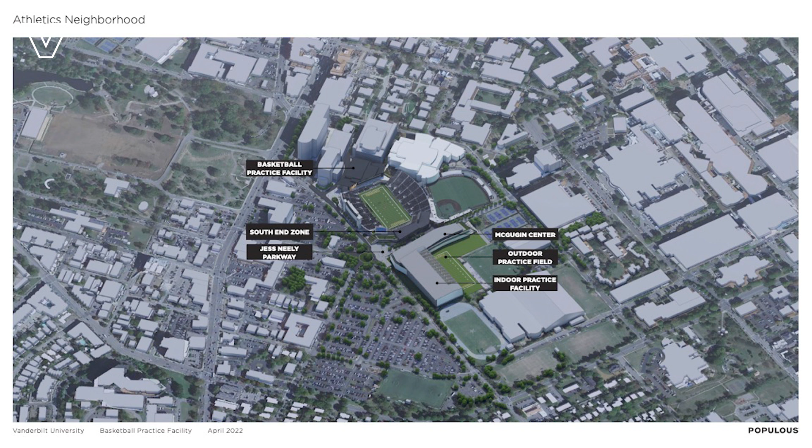So the overall athletics neighborhood is going to be absolutely transformed when it's all said and done. We're going to be in relationship with Vanderbilt for a long time, and we're absolutely thrilled about it. One of the things we're going to talk about is the basketball practice facility, but I wanted to show the overall vision of what Vandy United is going to end up being. This is basically a snapshot of some of the major projects within this first phase of the work that we're going to be doing.

Can I just jump in, Al, to say that what you're seeing right now are the projects that we have publicly announced. There is more work to come, but we're being very deliberate to unveil those when we have more concrete information. So there is more to come. Right. So Candice, like you said, we always love to start with the vision, with the core values, and it started day one, right? Yes.

After we were selected and had the opportunity to talk with you and Chancellor Diermeier, this quote hits me every time I see it—what Vanderbilt is about and what you're wanting to do with these athletics projects. So we're very fortunate to be in partnership with Vanderbilt, because at Populous we feel like we're at the forefront of disrupting all the sports and entertainment projects we work on.

So let's get right into it. Before we put pen to paper with anything, we listen, and we've been very intentional about engaging with a lot of user groups and constituents. This is the basic framework of what we've heard over the first couple months of working with Vanderbilt. We want to make sure we grasp and understand the history, speak to the tradition and excellence, and make sure the architecture is clean. But at the end of the day, it's all about performance and enhancing the student athlete experience.

When we talk about elite and development, we want to make sure that's at the forefront of our design thinking. As we go into our core design principles, we take the things we've heard and distill them down into form making—ideas we really want to drive home across all these projects. With the basketball project specifically, we want to make sure it's performance driven, all about the student athlete and development, both athletically and academically.

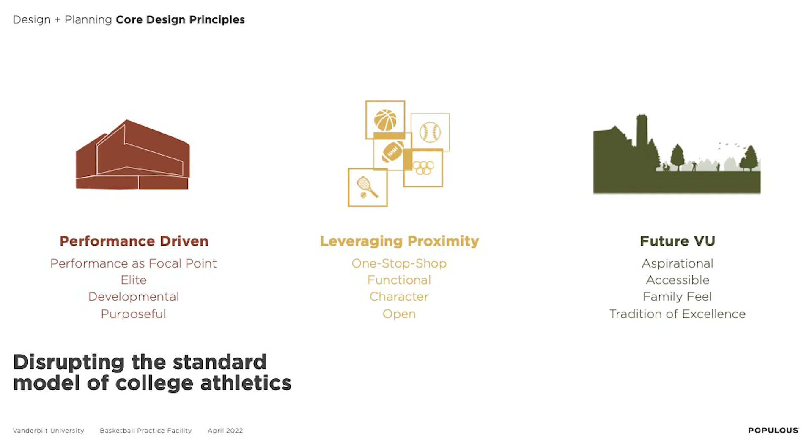Candice, you said you're landlocked. I'm a firm believer that constraints bring out the best design thinking, and I'm excited to share what we've done with the basketball building to leverage that proximity and make it a positive, not a negative. Right—one of the things you said was you wanted to take advantage of this space and not fight it, which I thought was an interesting way of putting it.

Absolutely. With the campus and the athletics neighborhood being so tight, we felt we had a lot of opportunities to take advantage of the closeness. You'll see in the diagrams here in a second how we're embracing the proximity, embracing the closeness, and connecting the new buildings to the old and the old to the new, really making it a cohesive neighborhood. As we move forward, it's exciting to see how this all comes together.

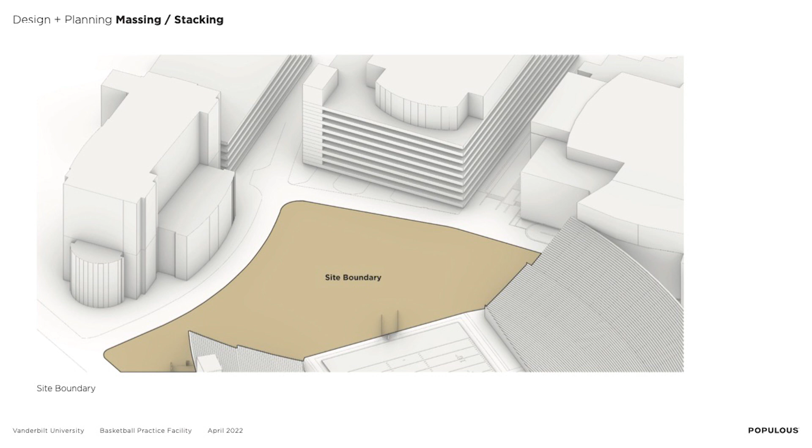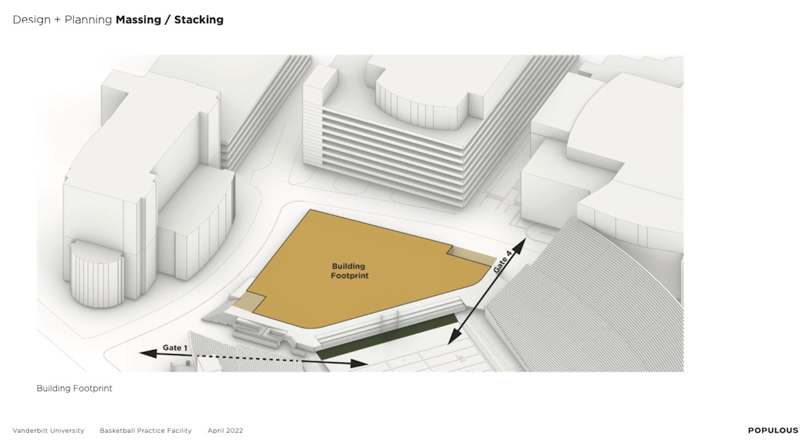We've mentioned a couple times now the challenges of the site—not only is it tight, but the shape is unique in and of itself. One of the things we always do first is make sure we get people in and out in a safe environment. Given the uniqueness of our site, we had to honor the existing conditions—Gate 1, Gate 4, those are gates into football, so we had to maintain those. That helped us develop the building footprint.

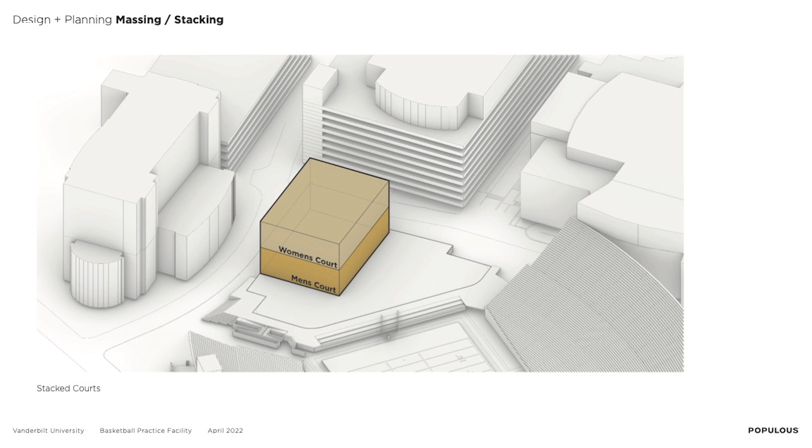Step two of designing this building centered on the function of the facility. We obviously needed courts for both the men's and women's programs. In an ideal situation you'd want these on the ground together, but given the site constraints and the limitations from expanding due to the Marriott to the north and Memorial Gym and the Kensington Garage to the east, we had to stack the gyms. This is something we've done before—there aren't a lot of building types like this in the country, but we've done it before and we're very confident it works.

This ended up giving us a very unique situation with a basketball practice facility that you typically don't see. When a practice facility is spread across one level, you always want to locate your performance programs—the weight room, locker rooms, athletic training—on the same floor as the basketball court. In this situation, we were able to not only do that but also include the coaches' spaces, whereas on a more traditionally laid out practice facility, you'd have a second floor dedicated to coaches and staff.

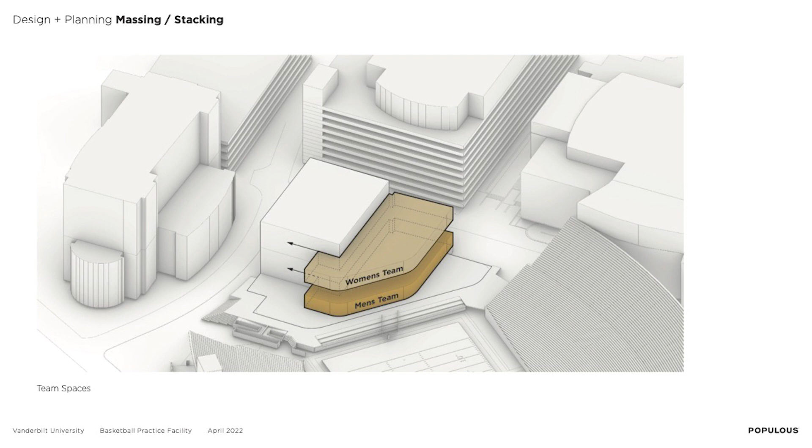Given the site constraints, we had to get really creative on programming the building so everyone has the adequate space, and it provides a different leverage point for student athletes to move around efficiently. We all know that student athlete time is delicate and sensitive, and we need to be sure they get from point A to point B as efficiently as possible.

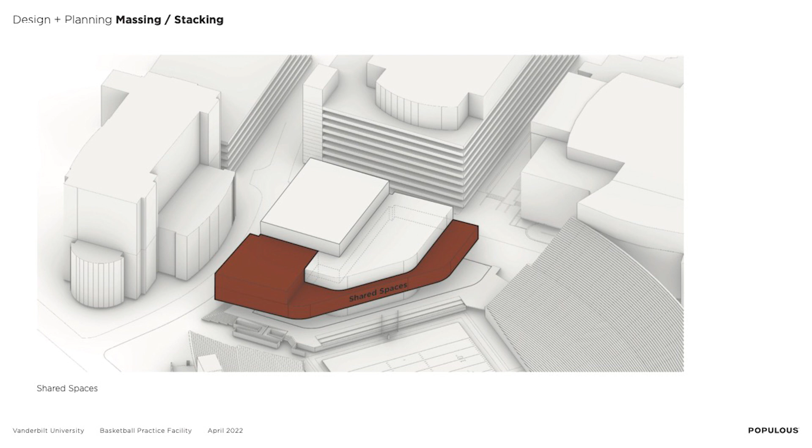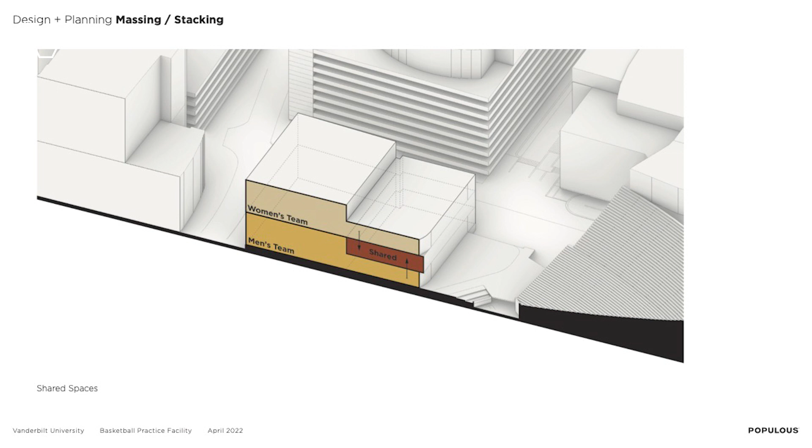So we felt like stacking the program for men's and women's provided that opportunity. Finally, in the middle of this environment is the shared spaces, where the weight room and athletic training live. If we cut the cake in half, you'll see that offers us an opportunity for the men's and women's teams to have equal access to those shared spaces. The hydrotherapy, athletic training, weight room - everyone will be able to come at equal distance to these spaces. One of the things we see in a more traditional practice facility is sometimes the men or women may have a little bit of a better access point. We feel like we've solved that part of the puzzle by sandwiching the shared spaces in between the two programs.

And I have to say that I watched you all iterate through this and take the feedback from the coaches, and the fact that you found a way that both programs could have equal access - that's consistent with who we are. So I very much appreciate, and on behalf of our programs, appreciate that y'all took that very seriously.

Absolutely. Equity is important to us. We take that very seriously. It's not about Title IX - it's just about offering an equitable experience for everyone involved in experiencing this building.

And Candice, too, I think that's good - the student athletes and coaches have the chance to have those interactions on a daily basis, where the programs are working together and you're not just separated by floors, but everybody's together in the same space. Yeah, I think that's important. One of the things we were excited about with so many aspects of Vanderbilt basketball - I talk about this a lot - is watching Jerry Stackhouse and his program and Shea Ralph and her program support each other. Their kids cheer for each other, they pick each other's brains. This building represents the tone of those programs, where everybody has their own space, but there's also a shared aspect, and then it's connected to the broader athletics footprint, like football, things that touch all of our student athletes. That's who we are.

So Al, I remember you saying early on in one of our meetings that everything that we did would be a tangible representation of who we are - everything you all gave us would represent what Vanderbilt stands for. I'm excited about this because I think this is a great example of that.

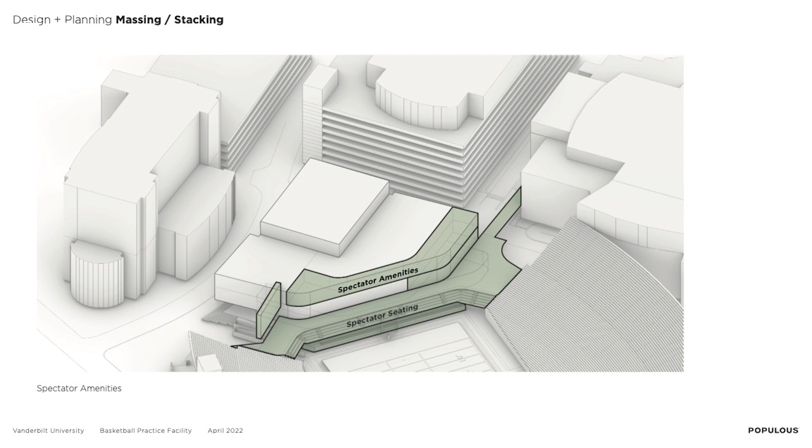Finally, to support those spectator facilities and amenities, we wanted to give the North End Zone fans a premium experience, with lounges and club spaces we've created that serve as multi-purpose space for basketball as well as football. Even beyond that, it's multi-purpose space we could end up using every day of the week. It will enhance game days, but we have the opportunity both within athletics and beyond to utilize the space. It's much needed space, so I'm excited about that.

Let's dive into the floor plans. First and foremost, in regards to carving out the site and developing our building footprint, and building the volumes to understand our function, getting folks in and out of this facility was a little bit of a tricky challenge.

If you remember, the North End Zone right now is a back-of-house situation. For concerts it serves as stage-in, emergency vehicles come in and out of there, and on a Tuesday afternoon it's where operations kind of lives. So we understood what that meant, putting a building there essentially turns a back-of-house situation into a very front-of-house situation. We'll talk a little bit about what that means here in a little bit.

We organized the building in a couple of different ways so that we gave the public a clear understanding of where the gateway into the neighborhood from the north is. At the same time, we wanted to make sure the basketball programs had a direct and clear understanding of where their home starts. Understanding that the majority of the student athletes come in from the east, we felt putting the team entry on the east side of the building made the most sense.

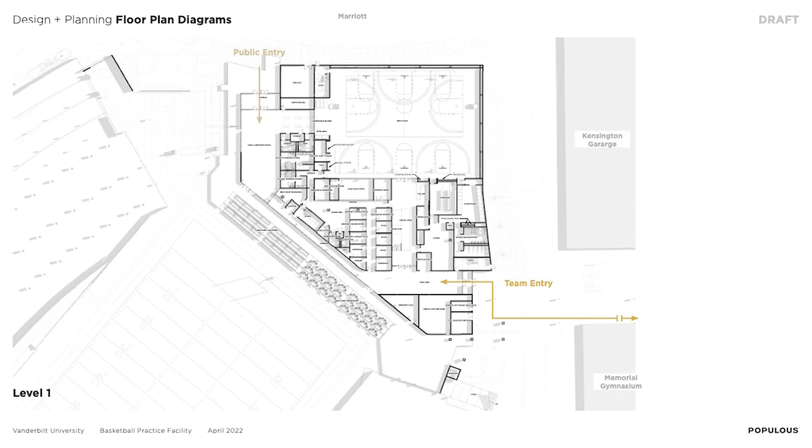It's a private, dedicated entry for student athletes, staff, and coaches, while we locate the public more to the north and west to give them access to a brand new building. We're also transforming Gate 1 into a more pedestrian-friendly and inviting environment, hoping to increase traffic there on football game day. On level one, we have our men's coaches' offices, staff offices, and locker rooms. In between all of that, and this permeates through the entire building, we've got what we call the central spine—the heartbeat of the facility, where student athletes, coaches, and staff will be able to meander up and down this spine and share space with one another.

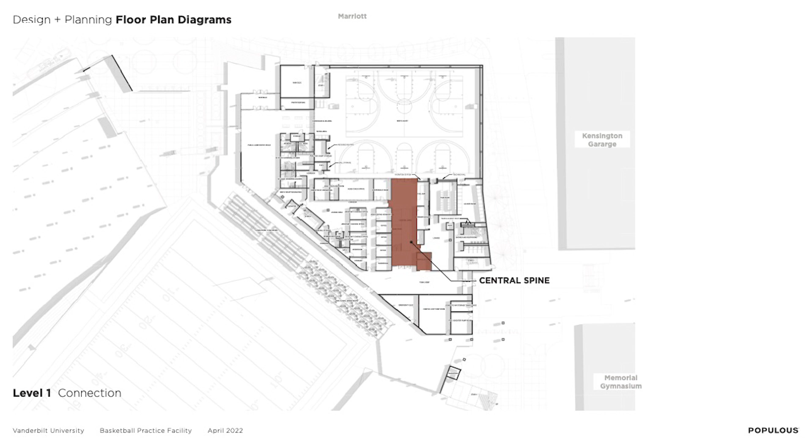In designing facilities like this, what have you learned about how the flow of the buildings works, and how things make sense as far as where the athletes, the student athletes, and the coaches have their own space, but it all makes sense in terms of how you travel throughout the course of a regular day?

Yeah, it's all about efficiency, right? Getting the student athletes where they need to be as quickly as possible, because time is limited. The time with coaching staff is limited, time to train is limited, time to practice is limited. So we want to make sure that when we lay these spaces out, we're able to fully take advantage of the time limitations they have, while also maximizing the amount of space they can use. If we move up one level, this level essentially shows our performance level.

Talking with the strength training staff and the athletic training staff, they really wanted us to take a unique look at how performance is conducted, and not segregate the weight room from the athletic training, and vice versa.

On this second floor, we're going to allow fans and patrons, whether you're a football fan and donor or whether you're there for basketball, to take advantage of being able to go back and forth to Memorial Gym. We'll get into why that's important in a second.

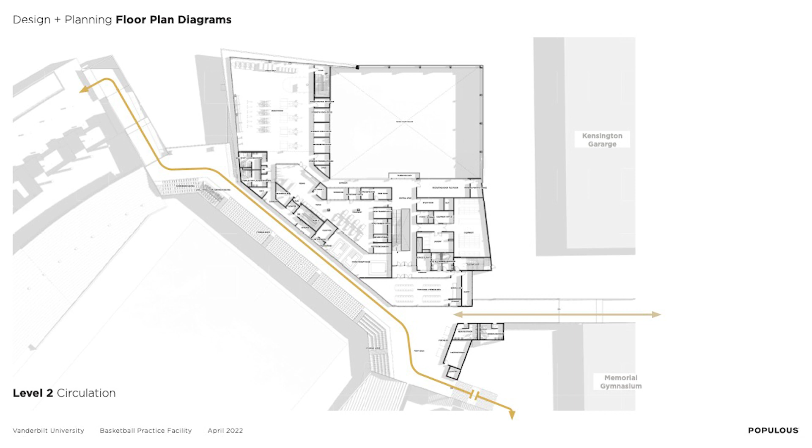Before we go into that, let me go back to the training piece. This is what we call the performance level. We're not dictating what is what, we're hoping to bleed the athletic training and the strength training together to enhance the student athlete experience.

I remember the coaches thought that was very important for flow, and those staffs talk a lot. They're in constant communication in support of the student athletes. I remember that was very important to them.

Our research has shown that with the strength training and athletic training staff, a student athlete in an environment similar to this has less recovery time, less rehab, and more performance.

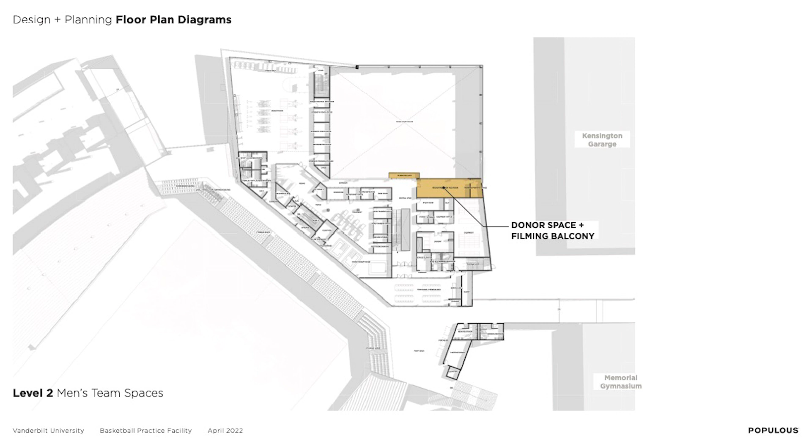We've got some donor space opportunities also folded in here, for those donors and high-end people who want to come in and experience practice in a unique setting. This is more than just caster chairs on the floor, it's an actual lounge space where they can enjoy themselves. Maybe bring a recruit up here. Recruits, I think absolutely, would be great recruiting space.

And then finally, I mentioned earlier about the football pathways with the 360-degree concourse and the ability to go into Memorial Gym. We've kind of bookended that with not only a team dining space, but a premium space for game day, this is basketball or football.

On a non-game day environment, this is going to be the new team dining area. Consider this the new Admiral room, right? We're going to have enhanced finishes and a really home feel for the student athletes to have pregame and postgame meals.

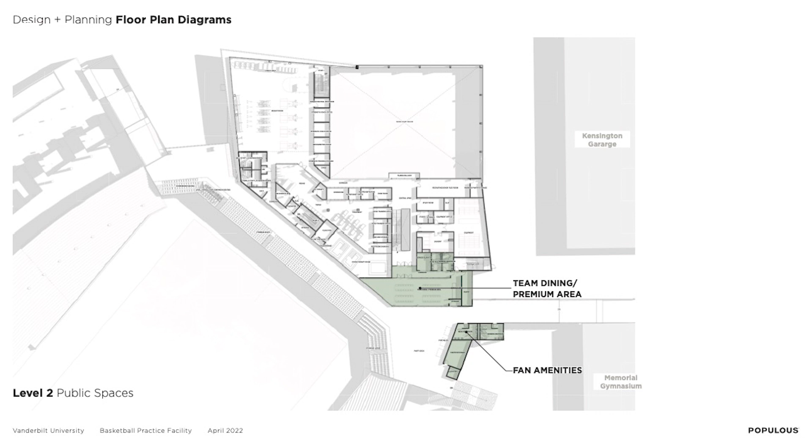This is important because on game days, the ability to have a pregame meal in your own space speaks again to the importance of efficiency. This won't replace what we'll ultimately see in McGugin, where all of our student athletes eat the majority of their meals. The idea that there's connectivity is important, however we know that in specific sports there are specific needs. I love how you all balance that. That's really important to us.

And that pregame meal, that's an important part of game day. Everybody sits together and has that time with the food, but also thinks about what's ahead with the game coming up. Back in the day, 100 years ago when I played, once you had shoot around, that's when your focus on the game started, and pregame became part of the ritual. Now that was 100 years ago, but I imagine it's still about the same.

Moving up one more level, one thing I want to make clear is that the men's footprint on level 1 and the women's footprint on level 3 are identical. Square footages are identical. Again, we're talking about equity and making sure every student athlete gets the utmost premium experience.

Offices, layouts, the locker room and the lounge may be a little bit different. Those specifics we're currently working on with both programs. Those are going to take on the personality of the head coach, the staff, and the student athletes. But we wanted to make sure that first and foremost, the footprint was exactly the same.

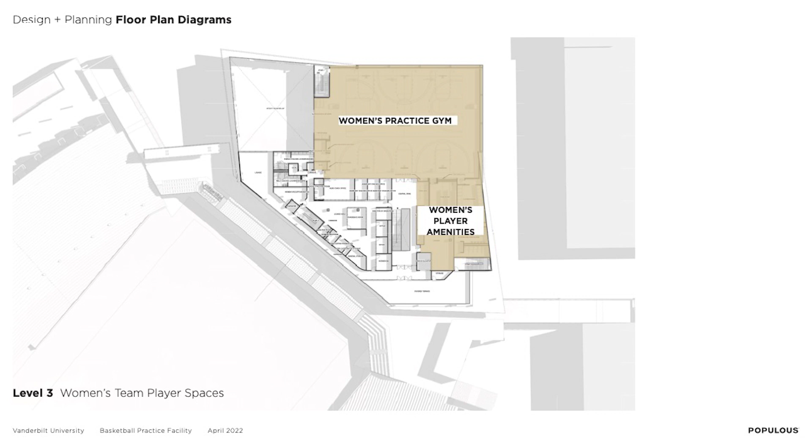Just like on the men's level on the first floor, the women have their practice gym, locker spaces, lounges, and film room on the third level, and they share that level with their coaches and staff.

We joke, Al, because one of the questions is, well, how did the men get the first floor and how did the women get the third floor? And the answer is, that's what they wanted. Backed 100% by science.

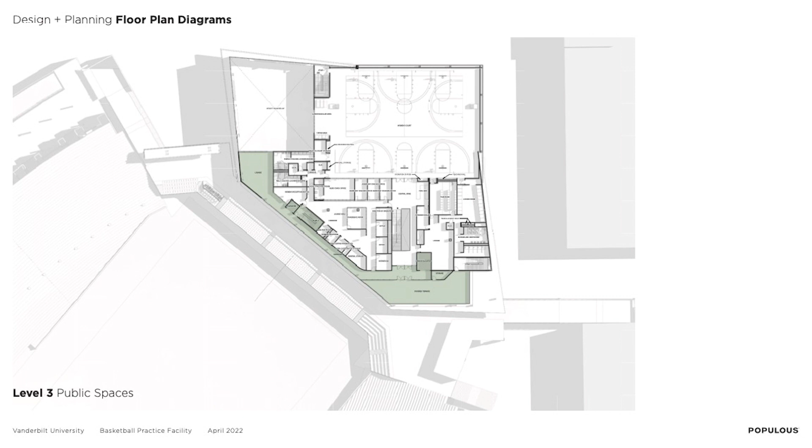Similarly to the second floor, the way the third floor laid out offered us additional public-facing, football-facing opportunities for premium fans and patrons for both football and basketball. So we've got a couple of terraces and balconies, not only for the football and basketball patrons, but also for the student athletes, staff, and programs to go out and enjoy a nice, relaxing day on an April afternoon.

Similarly to the men, we wanted to make sure we provided that same balcony experience for donors, families, and recruits on the fourth level. So it's a four-story building, and we're at about 90,000 square feet in its totality.

So it is one of our larger practice facilities that we've designed at Populous. I think it will probably be one of the largest in the country. But it's not about the size for us, it's about the fit. We feel like this building is going to fit Vanderbilt, enhance the values of what the university is all about, and it's absolutely going to increase the development of the student athletes, and that's the most important thing.

The one last thing from a floor plan standpoint is the site. I mentioned maintaining gates 1 and gates 4 earlier, but I wanted to show everyone how that's developing and why it's important that we not only maintain the gates, but enhance the experience. Most football stadiums are what I like to describe as four-elevation buildings, meaning you walk around the entire building, and it's got to be designed clearly so it doesn't look like there's a back of house or something less than desirable in approach.

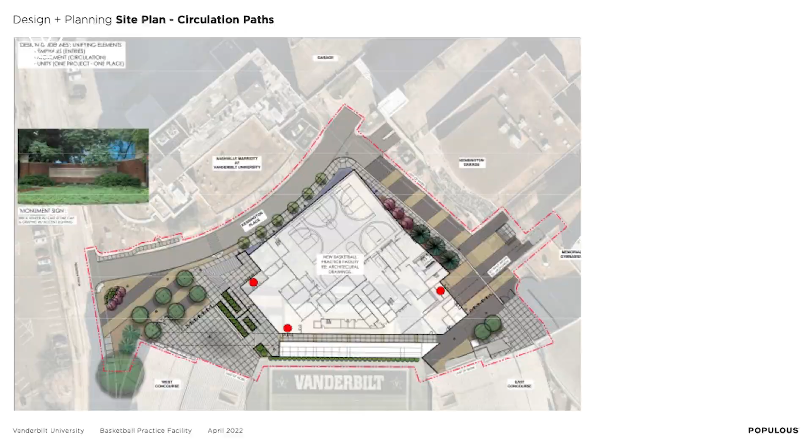Vanderbilt is all about making the change from a vehicular way of getting through campus to more pedestrian. Understanding those values with mobility and Move VU, we wanted to make sure the building was accessible not only for patrons, but also for those with mobility challenges. So we're continuously working on how everyone, able-bodied and those who may be mobility challenged, are able to experience these buildings.

To wrap things up, I wanted to talk a little about the design vision. We talked about the floor plans, the organization, and the function of the building, but understanding that at the end of the day, these are civic monuments. We understand these buildings need to last a long time, and there's got to be an inherent beauty behind them. So one of the things we did was take a close look at Future VU, especially around sustainability and our ability to tap into those values. We believe this building is shaping up to include a lot of those things.

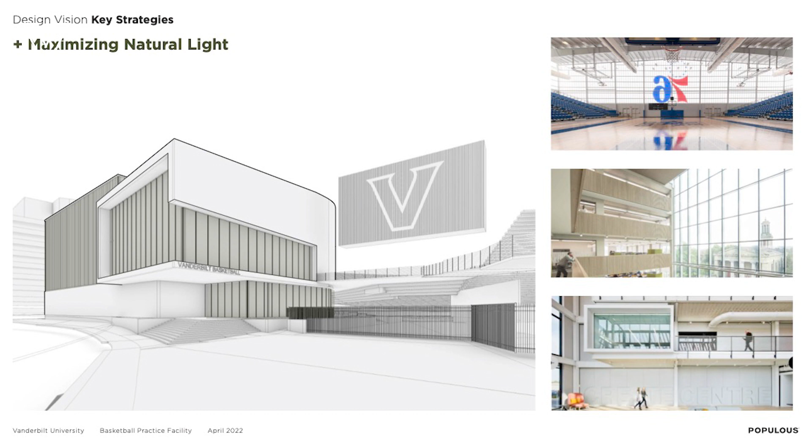One of those things is maximizing the natural light. We've got a north-facing front of the building that we want to take advantage of what we describe as diffuse light. With the sun shining primarily from east to west along a southern trajectory, it gives a softer, less harsh light to minimize glare and heat gain inside the building. We're currently looking at different types of materials outside of glass, like polycarbonate, to help with that diffuse light, while offering the same level of sustainability metrics that we've been charged to meet.

Yeah, it's interesting that you're talking about the technology changing for natural light. I've been in old gyms where they have giant windows and there's a lot of glare. I've been in some newer facilities where it worked perfectly and you had the natural light, there wasn't the glare, and it really enhanced the place.

Absolutely, it does enhance the place. Even though sometimes we're charged with mimicking the competition floor in a basketball practice environment, we feel that there are so many natural benefits to being able to work out with natural light more than artificial light. And so we wanted to make sure that we were clear with the staff and with the programs that they wouldn't get glare.

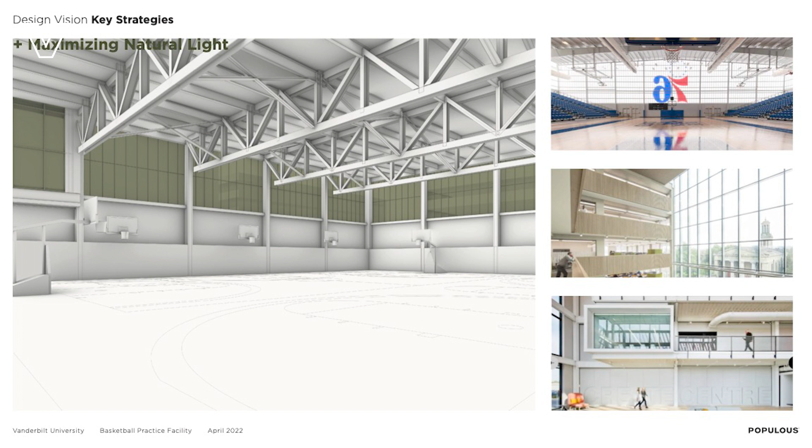And that the performance of the players would not be hampered due to this. Just as important as what the building looks like during the day, we want to make sure that it provides a level of drama at night as well. So obviously adding a lot of glass and kind of clear materials gives us an opportunity to provide kind of a canvas for an identity at night.

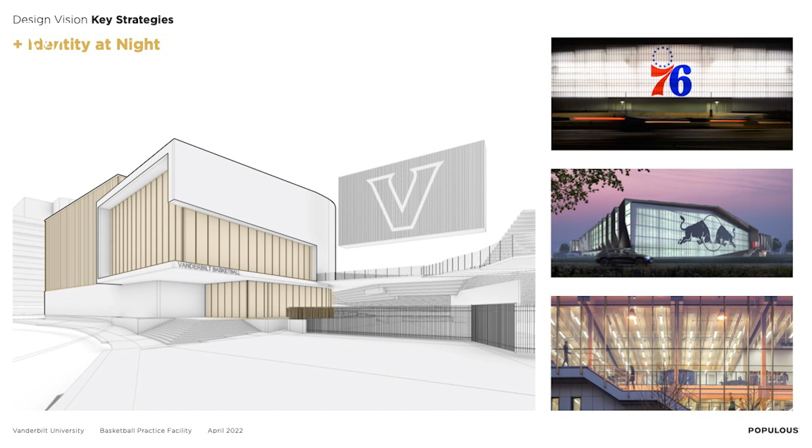We talked a little bit earlier about this approach from the north on Natchez Trace into the neighborhood, and what a way to be able to experience your first glimpse of Vanderbilt in the athletics neighborhood at night, with kind of a glowing lantern in front of you.

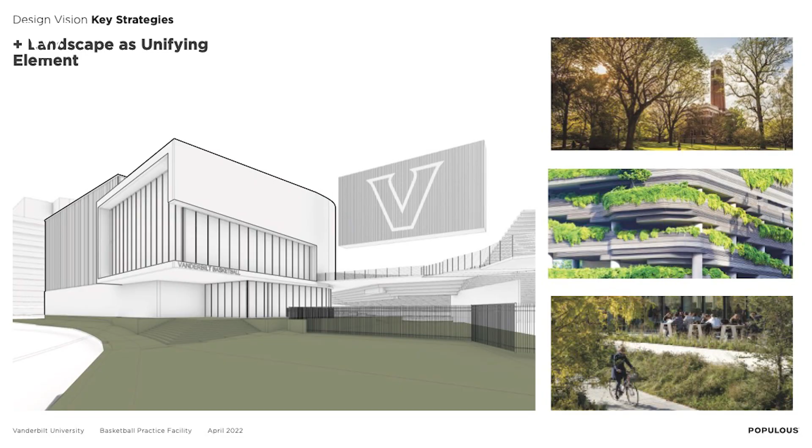We talked a little bit about landscape. Some of the key strategies that we're incorporating with this design is using it as a unifying element, not only within the neighborhood, but within the broader campus. Vanderbilt is a registered arboretum, and so we're working really hard to bring in those elements into every facility. Here with the basketball building, we're looking at different ways to maybe terrace greenery, and like I mentioned earlier, really offering an accessible and natural environment for people to enjoy as they approach the building.

Some of the details that we're really looking into are based off of sustainability in the feel of a green environment. These buildings will be LEED Gold, and so we have the opportunity to really showcase what that means.

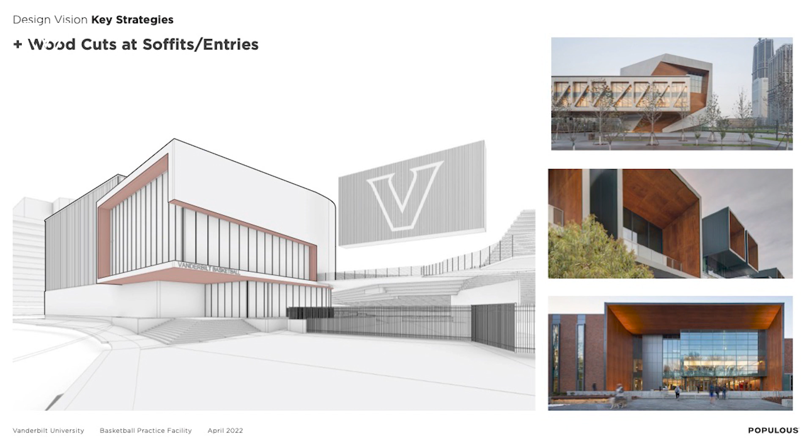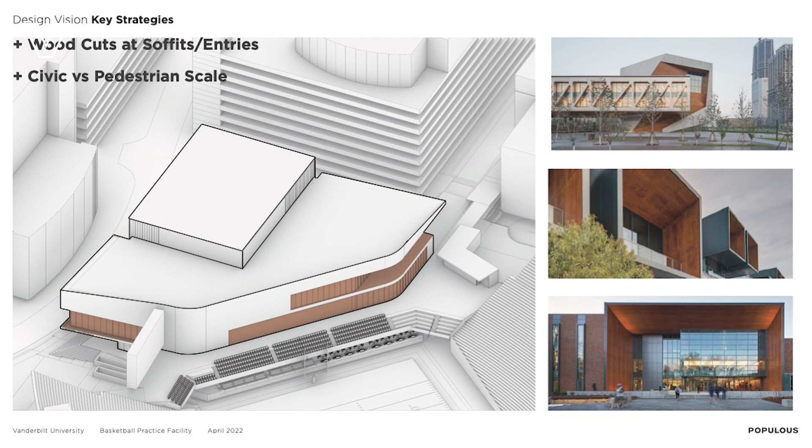One of the things that we wanted to do on the outside as well as the inside is to start introducing a warmer palette. Wood and natural materials to make the place feel a little bit more inviting. These buildings are big, and so we have to make sure that we do some things that help bring down the scale and make it more of an inviting environment.

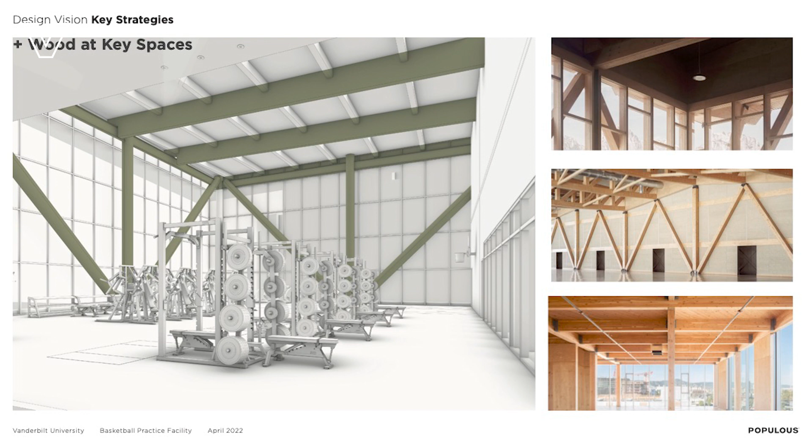So not only on the outside do we want to introduce wood, but we also want to introduce wood inside as well. Whether it's the basketball gyms or the weight room, integrating some of those design features from the outside in, hopefully playing off of the broader conversation that Vanderbilt is trying to tell.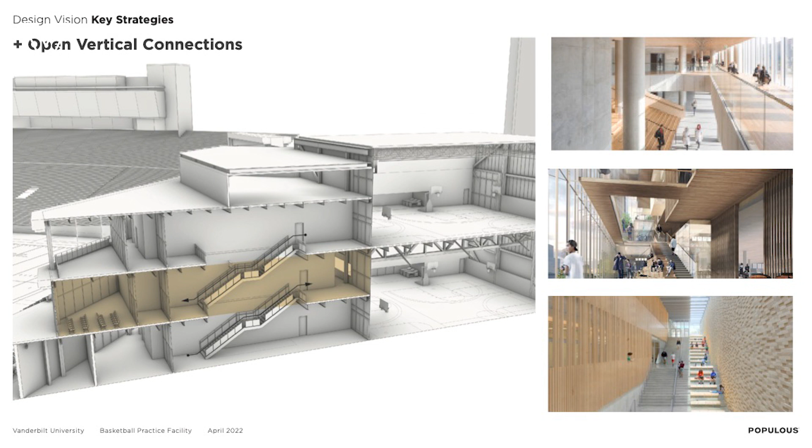And then finally, I mentioned the central spine. This diagram here shows what that could really mean as people traverse up and down a level of stairs and some elevators to get from floor 1 to floor 2, floor 3, and down below.

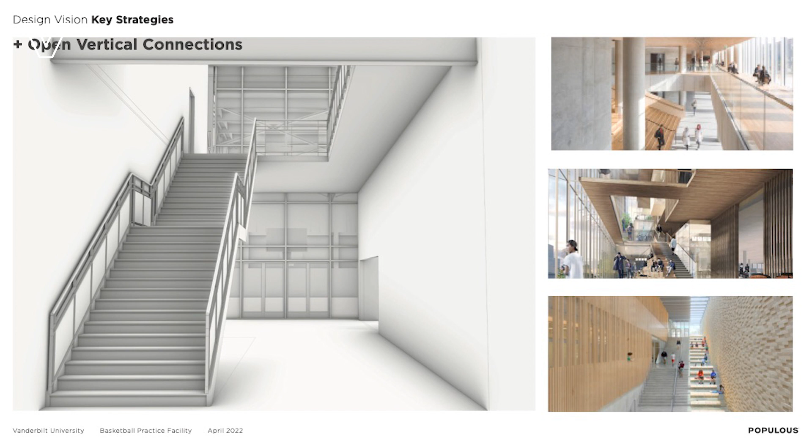We feel like this is going to be a gem of a project. It's going to be an icon for the university. We're thrilled to be able to offer such a unique opportunity to build one of the biggest practice facilities on one of the smallest sites. We're up for the challenge.

I feel like the team has been absolutely amazing, and not only delivering, but first and foremost listening. We're in current development stages of the design now, and I mentioned before, we're talking with both programs, making sure that those different personalities of those spaces start to come alive.

But the outside of the building, we're looking at as a true gateway into the athletics neighborhood, both for now and for the foreseeable future.

Yeah, I think that you have beautifully captured what we're trying to do. And that is, we are trying to be the biggest and the best, even if we're the smallest, right? We are trying to be integrated and connected with this university because we are in alignment with it. We are trying to provide a championship level experience to everyone who's important to us. So that starts with the student athletes, but that's alumni and fans and donors and faculty and staff.

And I appreciate this because, like you said at the beginning, this is going to be a transformation. This is the first step. It will be iconic. It will be beautiful. It will be effective. It will be efficient. And I'm excited. I really appreciate you, and I appreciate the partnership of your team.